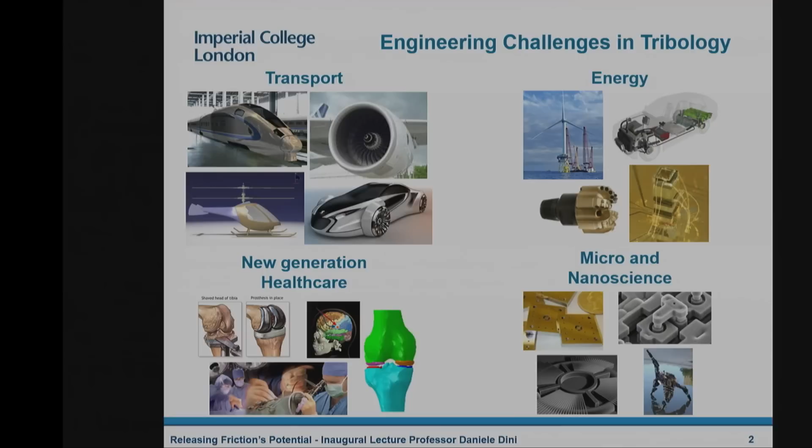Not to mention the fact that as I'm moving, I'm stretching my cartilage and moving a lot of joints in my body, and there's a lot of understanding in looking at the friction between joints that goes into healthcare, but also some more exotic applications I'll speak about. And there's quite a lot of work, especially in recent years, focusing on the importance of looking at machines getting smaller and smaller and understanding how they work, and that's where friction plays a key role.

Now, obviously, in this panorama, there are lots of challenges, and tribology is in all of these. You can almost try to look at the field of tribology in the broadest sense again, but this time looking at things that are more classical applications in tribology.

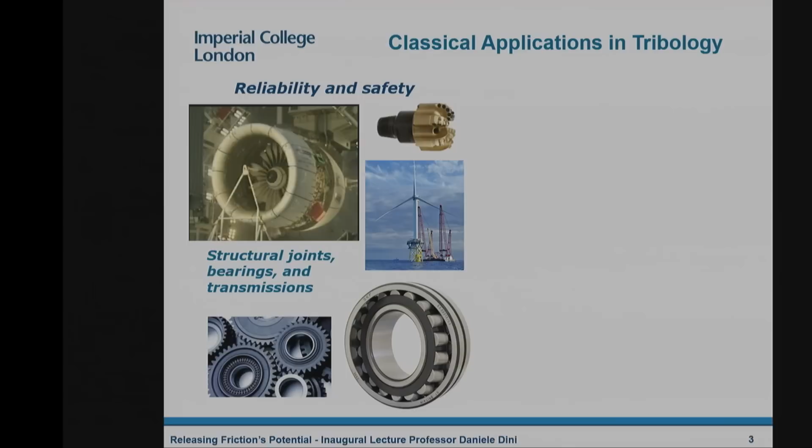And this is the application I started with my PhD when in Oxford, in collaboration with Rolls, we were trying to understand how the detachment of these blades come in these engines and trying to avoid it. And this is a typical phenomenon where you got blades that potentially run against the disk, and if you're not careful, boom.

The idea is, obviously, that's a question of reliability. You want to make sure these things are safe, and there are lots of components. There are billions of these components in everything that moves around that you want to make sure it's safe and lasts very long.

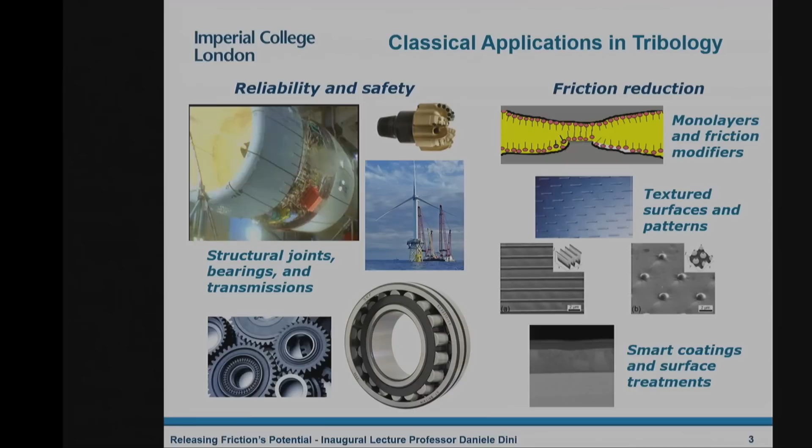Now, the other classical field of tribology is the one in which lots of people have been trying to understand how surfaces interact to lower friction. So lots of people want to save energy, we want to reduce friction, and you can do that through different things. You can actually use lubricants and improve the lubrication between surfaces, or you can change your surface itself by using coatings or texturing to modify its performances.

But obviously today, and especially looking at healthcare issues, there are many other areas in which tribology is important. So we've been looking at the way joints work, both artificial and real joints, but also you'll be surprised how important tribology is when you do neurosurgery, because you need to understand how tools, for example, interact with very soft matter.

And finally, obviously, there is, as I said, again, you go back into the fact that there's more and more applications coming from the smaller scales, and understanding how friction, the nature of friction and how it comes about with different manifestation at those scales is very, very important.

And in fact, I'll start my cruise here through the technical part of the talk, looking at various aspects of contact mechanics, but also tribology in the sense that taking any element that has got parts in motion, in this case I'm taking a bearing because there are billions of them running in any of the things that you move. If you zoom into the contact, if you zoom into the parts that actually rub between each other, you soon realize...

...that these components, A, have got rough surfaces, B, they usually have a lubricant between them, could be obviously different types of lubricants. But actually, what happens at the interface here is dominated by things that happen at very small scales. Depends on how your roughness interacts, depends on how your solid deforms, depends on how the fluid moves between the surfaces. And again, you can almost go down and down in scales to think about how atoms interact at those interfaces.

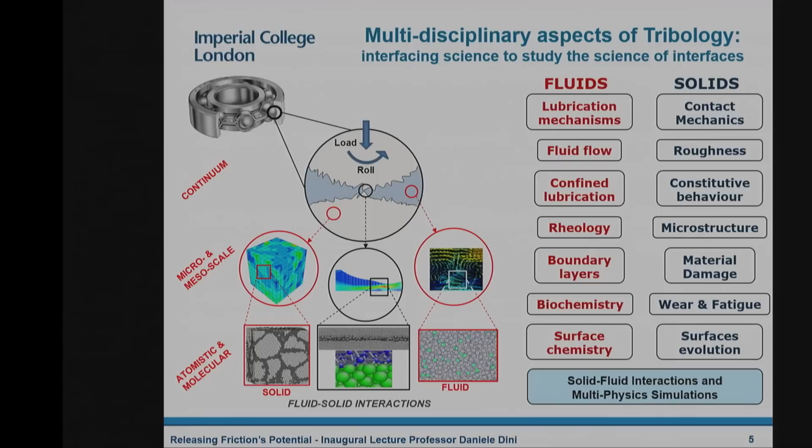And if this is the scenario, I joined the group in 2006, and I joined a group where the majority of the people in the group were experimentalists. And if you just looked around the lab, you will soon realize that people were doing experiments at all sorts of scales. So here is a map of time and length scales. And you will get people who were doing experiments on entire components. You will get people who will do experiments, laboratory experiments, looking at smaller components.

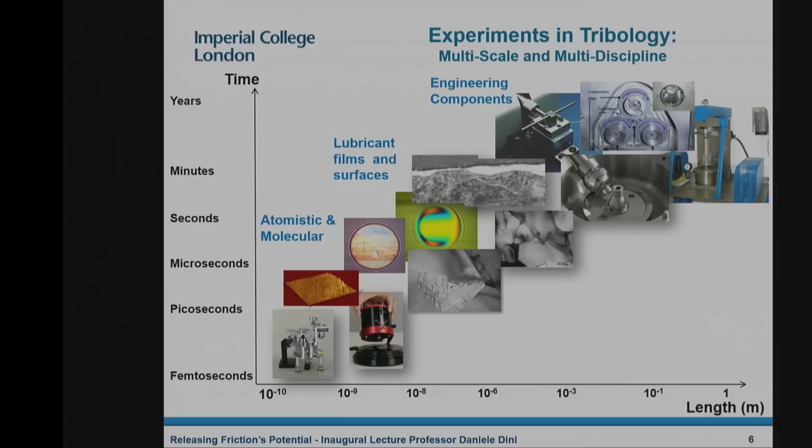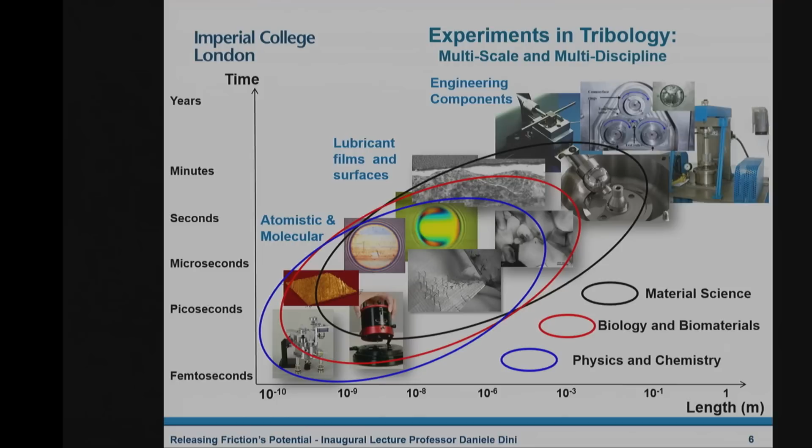And then you were getting loads and loads of experiments trying to characterize what happens at the interface in different parts. And in fact, one of the things you realize straight away is that lots of people tend to interact more when you go down in scale. In fact, you get a lot of material scientists interested in tribology when you start trying to understand how the material evolves or what happens to the fluid in contact. But also, biomaterials and biology has become more and more prominent in this area. So you get a lot of people with a biology background joining this. But finally, you also realize that the physics and the chemistry that underpins the mechanism in tribology, it's all happening at the smaller scales. And that's where most of the contributions from this area come.

The idea is that I joined this group, and all I've set out to do in my time here is to build the equivalent with models. Throughout my career, I started looking at models at different scales, and more recently at connecting models from the smaller scales to the larger scales. Here we're talking about something I'm currently doing, which is trying to bridge all these scales and combine these techniques into a unique tool that people can use in different areas.

It's been a bit boring so far, so I'm going to give you a bit of a personal trajectory. My personal trajectory went up to down. According to my mom, I started getting an interest in cars and airplanes about that age. I thought I wanted to be a basketballer, but that's a different matter. That's what she said. She's not here, so she can't testify, but I'm sure she will be hearing this soon.

Later on, I did get my interest in the larger length scales. Those of you who have never seen me around equipment or a lab will be surprised to see me doing experiments in Oxford during my PhD days. David and John definitely know I've been there. Later on, I decided that in order to go down in scales, I needed computers, big computers, and students, clever students. Both of them came very handy.

I think with maturity came the realization that models on their own are not really needed, so I jokingly put back my gown to show that experiments are also important. One of the messages I'm going to try to convey today is that there's no good model without good experiments, and I'm very lucky to be here with lots of colleagues who can support everything we do with experiments.

So let's go back to the serious stuff. One of the things I'm going to do now - and I have to apologize to those of you whose work I'm not going to be able to show - is to give pills of the research we do across different scales and how we've managed to make some breakthroughs in this area. So I'm going to start from the bottom of the scales, going all the way up.

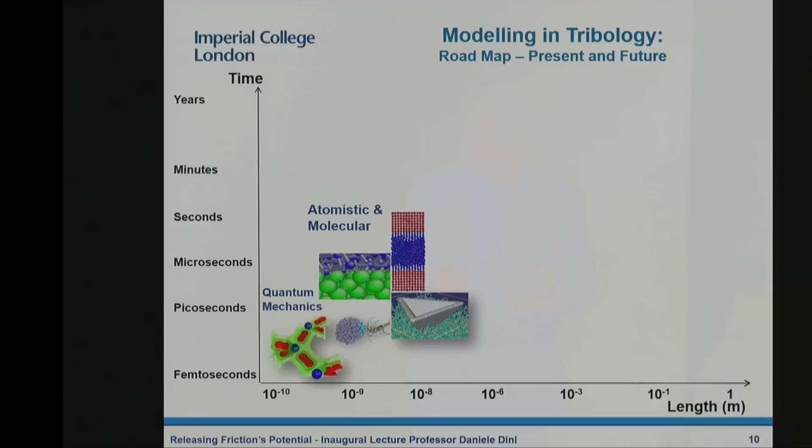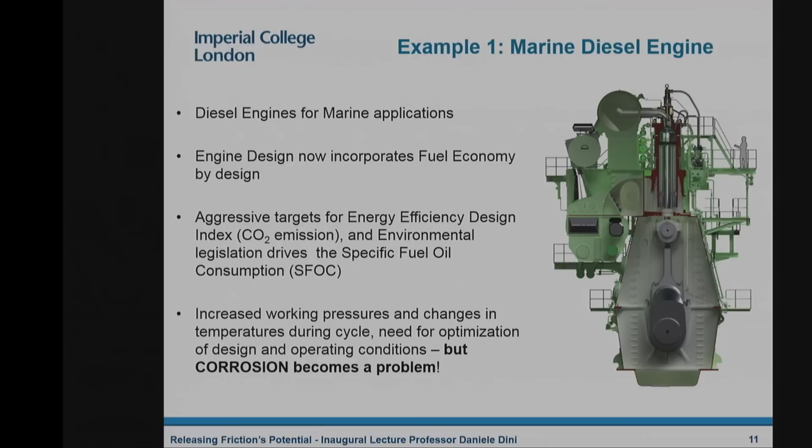Some examples of the work we've done: the first is looking at work we did on marine diesel engines, trying to understand the effect that changes in regulation have had on these systems. We really look at the system, which is very big - look, this is the size of a person - and we're trying to understand how lubrication of these systems works. One consequence of the regulation changes is that people started looking at changing their lubricants to avoid corrosion, because changes in pressure and temperature in your engine have actually caused changes in the way the system behaves.

One of the things people realized is that if you don't change your chemistry according to your operating conditions, you can get corrosion in the system. So one of the things we explored at the molecular level is the effect that changes in the molecules in your lubricant have in terms of affecting inhibition of corrosion.

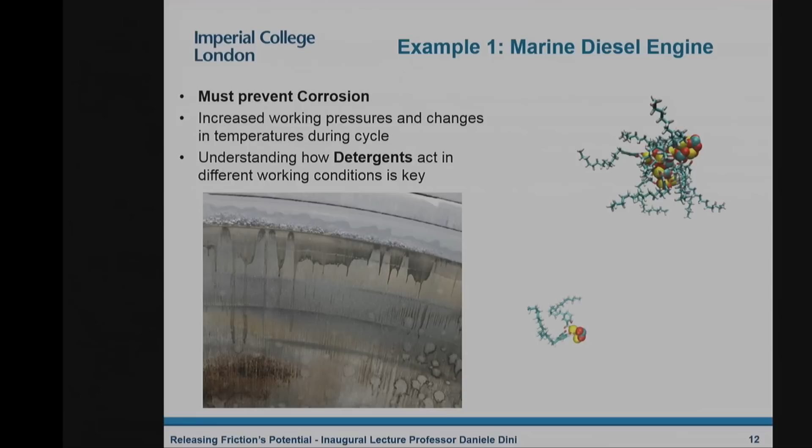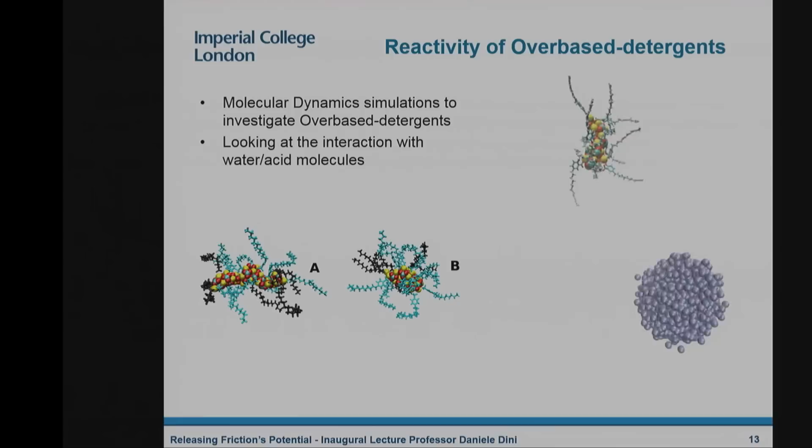Here, for example, we look at some detergent molecules and the way they develop themselves in fluids. Once they've formed what we call a micelle, we see how they interact in a bath of oil, let's say, with a molecule of water, to try to stop acid reactions in the system. With some very clever and long simulations on a computer, you can explain the mechanism by which these things behave, and start to understand how to design these molecules and how they interact with different pressures and temperatures in order to improve the performance of the system.

We're very pleased because we managed to explain for the first time how the mechanism of penetration of these molecules happens, for example, in interacting with water in solutions. And that led to my first cover.

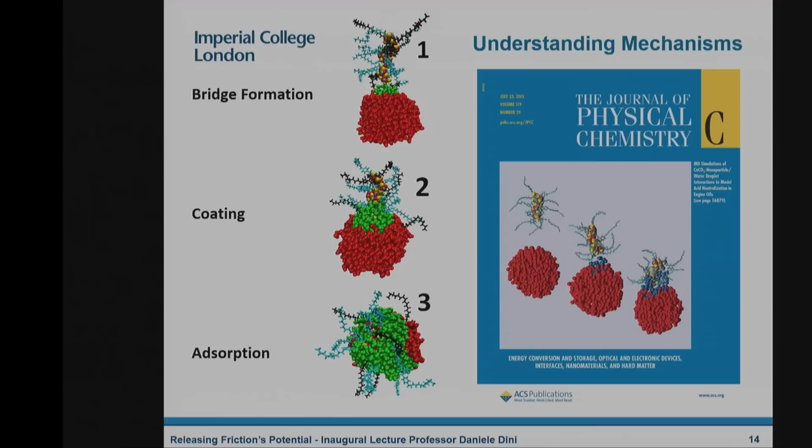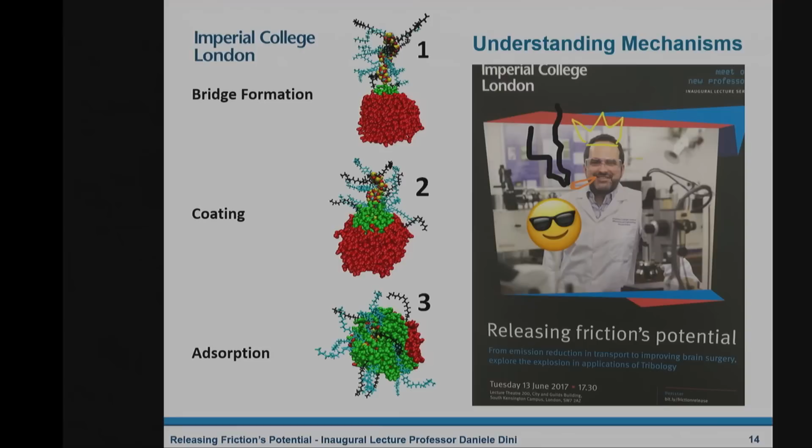Now that's the first example. I'm not going to go into the science in detail, as that would take half an hour for each topic and I have too many to cover. The second thing I want to speak about goes into understanding lubrication from the fundamentals. One of the things we set up to do with James, who's sitting over there, and others in the group, is to understand how using specific additive molecules linked to your lubricants can affect the frictional behavior of surfaces.

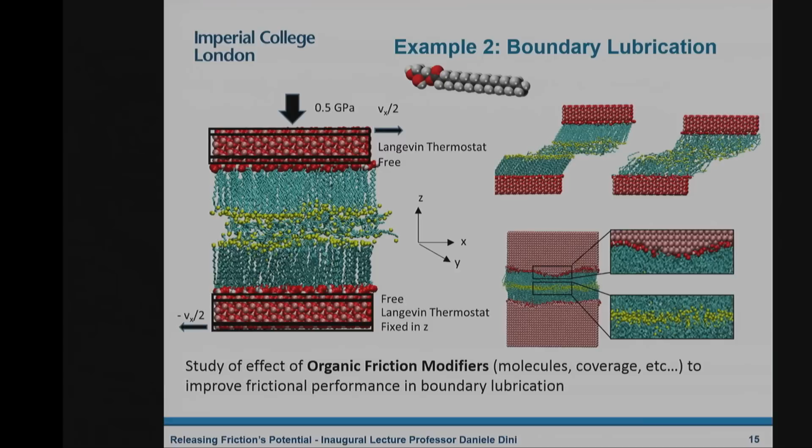Here we've explored the effect of specific additives—organic friction modifiers—when they are adsorbed on the surface. You're looking at nice iron oxide surfaces; they don't really look like that, but in a computer model they do. Here you've got adsorbed some fancy molecules put there to reduce friction. The idea of this study was to understand the mechanism by which you end up reducing this friction. To do that, we did many simulations, starting with looking at how, if you take two surfaces and squash them together—with or without roughness—and try to shear them, once you apply very large pressure, you get a certain frictional response.

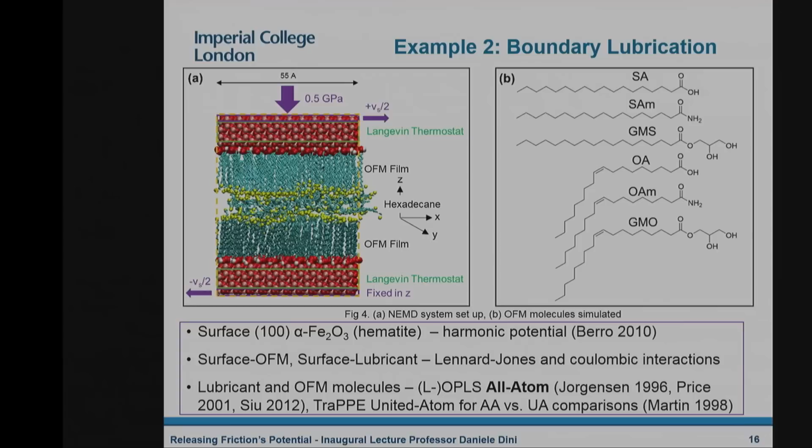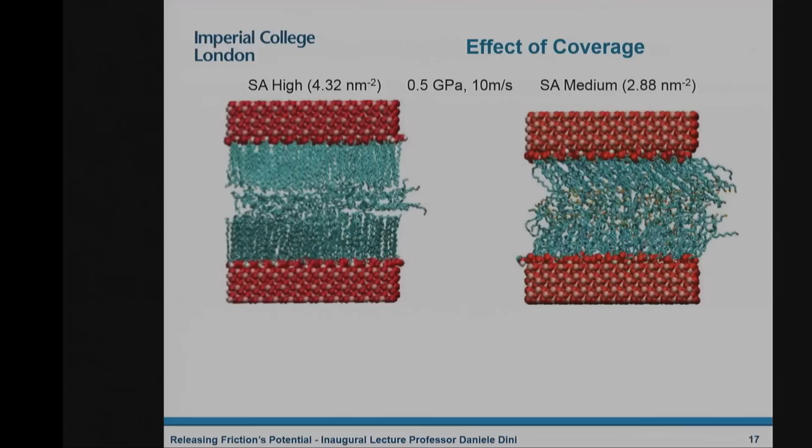We studied conventional molecules and did a lot of simulations—the best we could do with state-of-the-art molecular dynamics. We wanted to understand the effect of how many of these molecules on the surface affect the friction. If I try to squash as many as I can onto the surface, does that help? The answer comes from the simulation. If you look at this simulation moving, you're applying a load over the surface, shearing it, and looking at the friction that comes out of these systems.

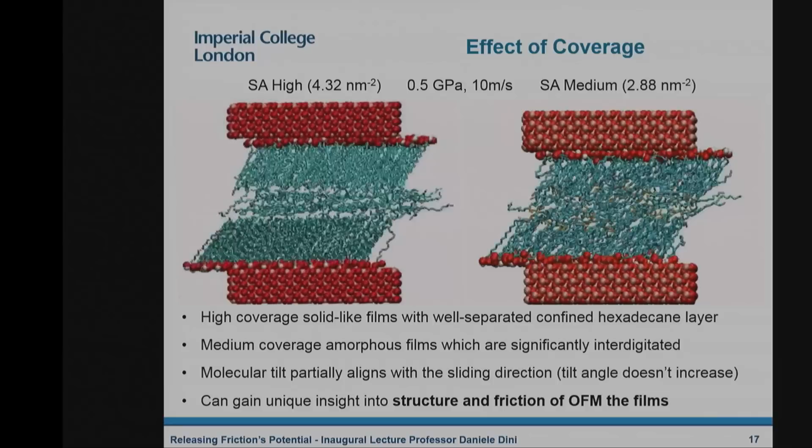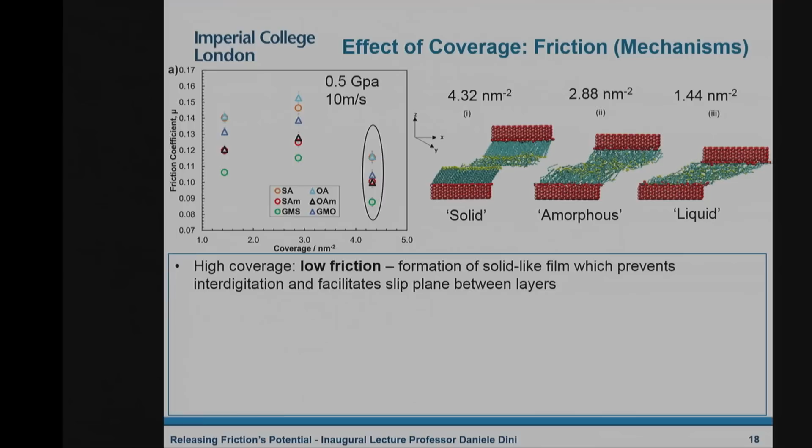It's a bit like looking at nice al dente spaghetti here versus badly cooked spaghetti over there—you'd expect the badly cooked spaghetti to be gluier and give higher friction, and that's actually exactly what happens. If you look at maximum adsorption, putting a lot of these polymers on the surface, or decreasing the quantity, you get different effects in terms of shearing of this lubricant. The lowest friction happens when you have a lot of those—you create a very structured system, and the slip is confined between the layers of these brushes. Whereas if you decrease coverage, you start getting intermingling between the molecules that stops easy movement between the surfaces.

That is also what was found in the experiments. At an intermediate level of interdigitation, with the lowest coverage, you start getting back the friction you'd get if these molecules were not present. This seems to agree not only in terms of values but also in the ordering of different molecules with the experimental results obtained by other people in the group. That again sends the message that we try to do models that explain what we see experimentally, which is one of the key themes of this.

The other thing we're doing more recently—though it's difficult to see here—is covering different structures with different molecules to see how they work. Again, the idea is to run simulations showing that different types of molecules in your system have different effects on friction.

Very recently, we looked at modeling real molecules between surfaces. This time we're not looking at very tiny gaps like before—we're looking at much larger gaps, studying the response of large quantities of fluid between the surfaces, and trying to compare our results with experiments done in the lab again.

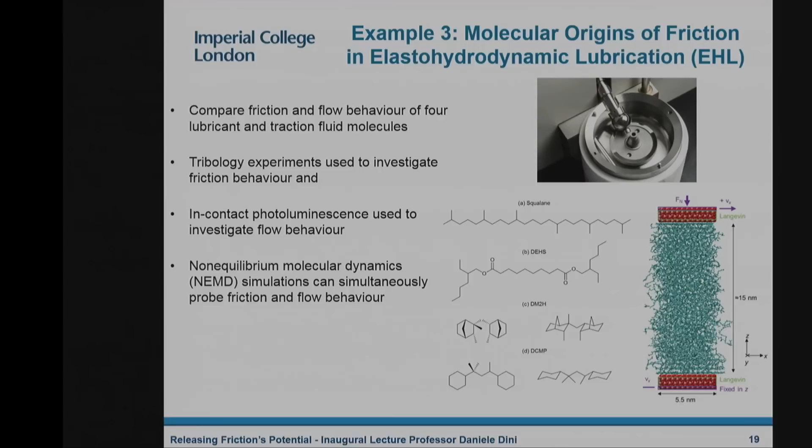One of the things we are interested in is to try and understand what is the effect of pressure and how fast you slide the surfaces together. One of the things we managed to do, which is fairly impressive in some respects, is model these things with atoms and molecules explicitly.

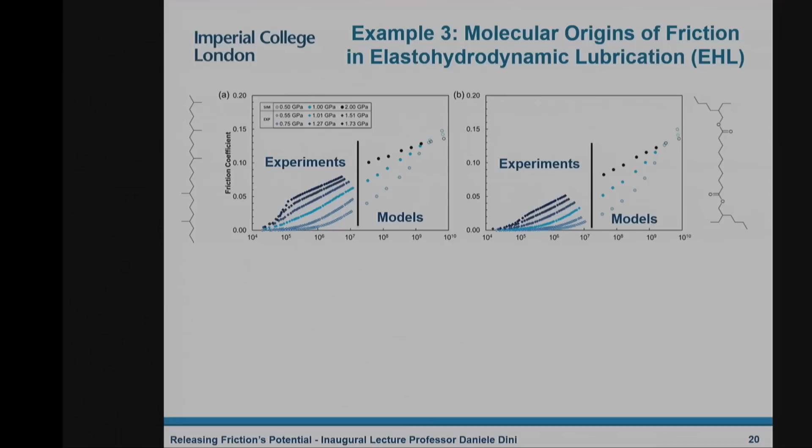We managed to push the models to scales never pushed before, and see that what we observe in experiments—for very long chain molecules, a low friction that rises with increased shear rate—can be mimicked by the models we developed. This works for all molecules, but you can also capture subtle differences between different kinds: if you have bulkier molecules instead of long chain ones, you still see a match, at least in trends, between experiments and models.

This is shown to be a function of what happens to these molecules when they are sheared. The simulations are key. If you look at the simulation, you'll find that the structure of this fluid, when confined between two walls, is responsible for the different behavior. For bulkier molecules, this is all due to shear localization, which happens much earlier than for molecules that tend to shear more easily.

This is the kind of thing we'd like to verify experimentally, and that's why we've done some experiments through Janet's group that have shown similar things on different molecules, and we're going to try to match explicitly with our models.

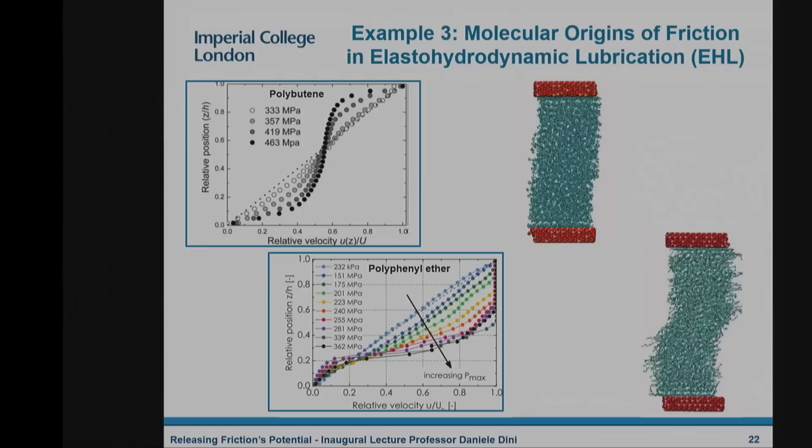That takes me to the end of that scale. Again, it shows how important looking at what happens at the atomistic level is, and it broadens the spectrum of the problem because we're going to go one scale up. I'm going to pick three simple examples to go through.

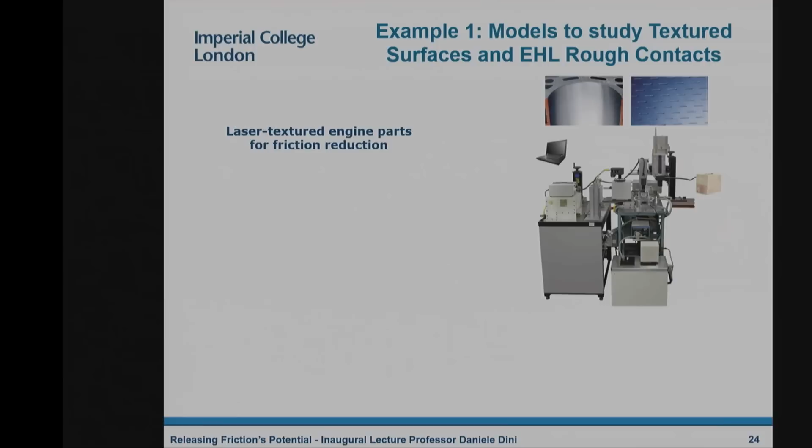The first one looks at a problem particularly relevant for automotive: why, if you texture a surface—for example in a cylinder liner in a car engine—trying to reduce friction in your cylinder, one of the most important things is to change the surface to reduce friction.

This was also prompted by a collaboration with people who could machine different types of surfaces, and the inspiration came from experiments. Here is a rig that Tom Reddyhoff developed in the lab, which tries to probe what happens at the interface between a piston and a cylinder liner.

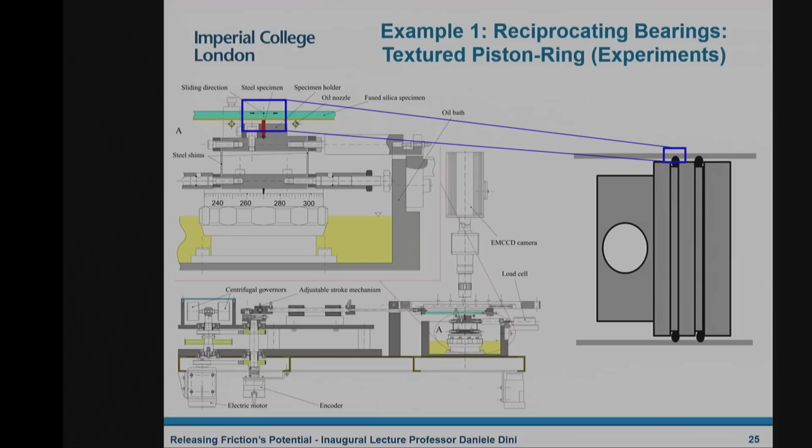Here you've got the cylinder liner replicated with a transparent surface, and a piston ring running against it. The beauty is that these surfaces, made of fused silica, are transparent, so you can look through them and texture them. The idea is that with this system you can model what happens when you slide one surface with respect to the other, and the response depends very much on what you do to these surfaces.

Here we're talking about looking at the microstructure of these systems, with pockets on the order of micrometers in size. So we're really talking about how a micrometer-sized pocket can change the behavior of this system.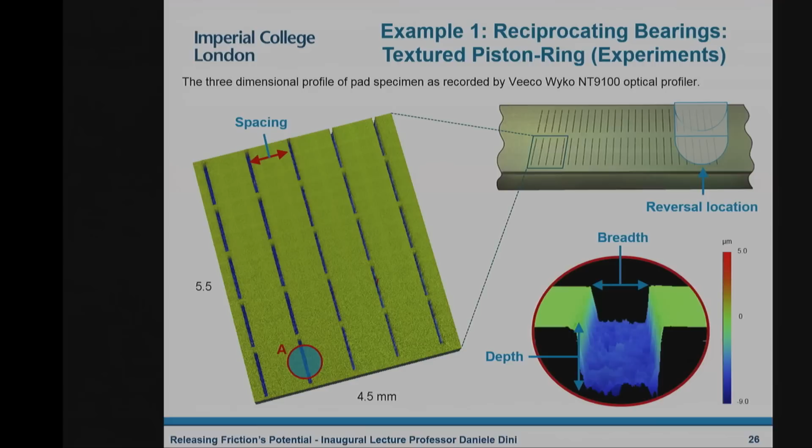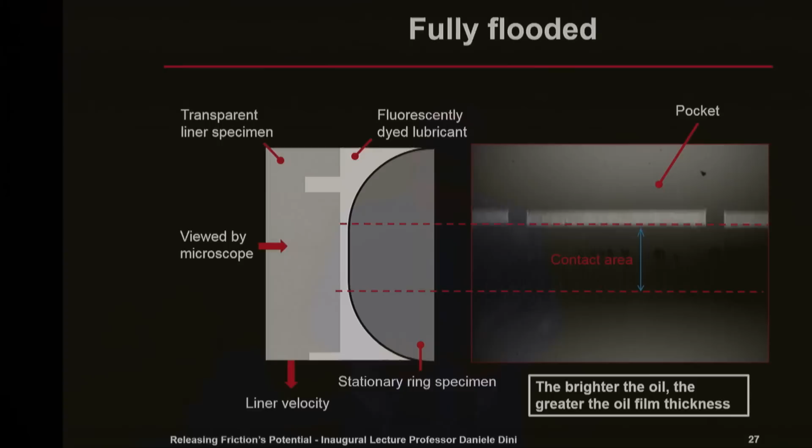I set out to explain this by first looking experimentally at what you see. If you look through these surfaces—say your sapphire window is here—you look through while the surfaces move with respect to each other, and if you monitor this, you see there is interaction between the pockets and the fluid.

You can see pockets of bubbles forming at the inlet and outlet of this system, and these obviously change as the velocity changes.

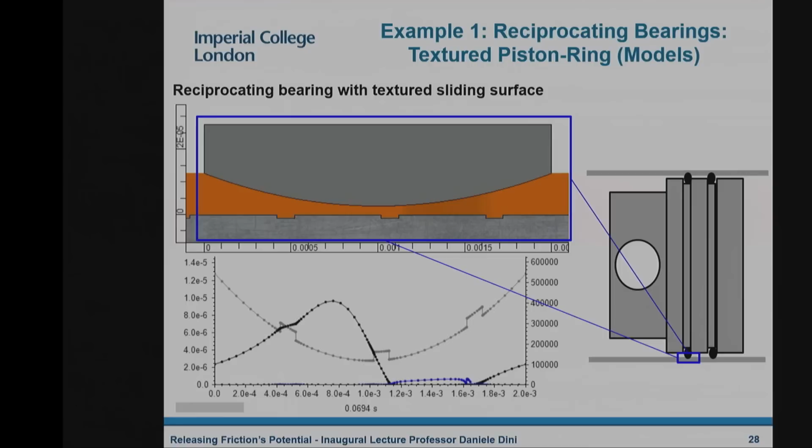We have since managed to explain this by looking at models that explain exactly what happens when a pocket traverses a contact, where you see a change in the fluid—cavitation happening, the fluid changing phase. As a result of this phase change, there's a change in the way the system takes on pressure from the lubricant, which is very important because it explains what happens through these pockets, and this can be explained with models.

I'm not going to go into the details, but it's the interaction between this pocket and the fluid that is responsible for the reduction of friction.

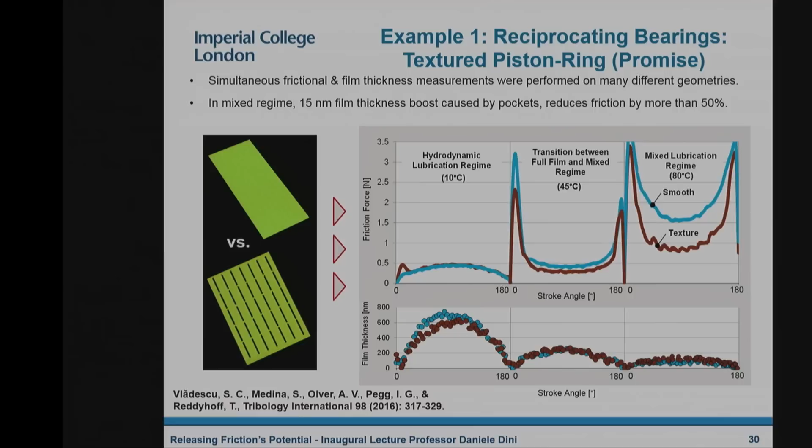This has been demonstrated in different kinds of problems, and there are different effects happening at different speeds. Imagine going with your piston at different speeds - at different speeds you get different buildup of fluid between your surfaces. Our model also allowed us to explain why at different speeds you get different effects.

In fact, the presence of this texture can reduce friction quite dramatically. These are the experimental values from Tom, and we get models that explain exactly the same trend. So that's, again, a bit more classical.

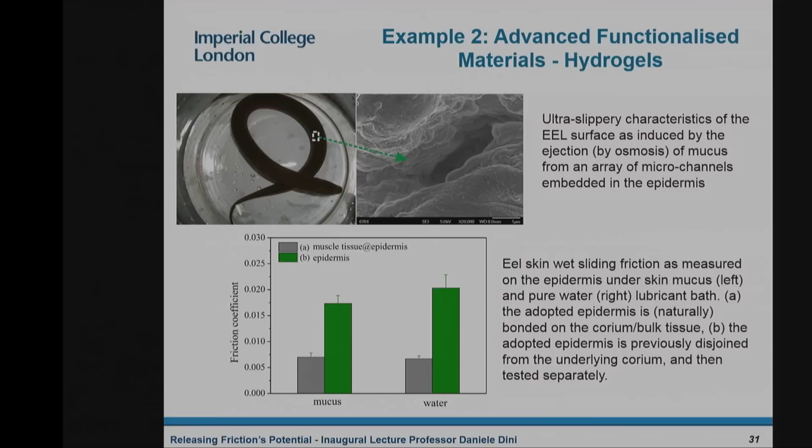Let's look at something more funky. The funkier application comes from my colleagues in China who wanted to do something biomimetic and decided to look at eels. From experimental evidence - squashing the eel and doing something to it - they worked out that the very slippery surface on the eels is due to the presence of mucus, which comes out by osmosis from pores.

Inspired by that, they developed something similar. They took a system with pores and infiltrated it with polymers, then cross-linked these polymers to form a hydrogel. When they cross-link this polymer to form a hydrogel and peel off the excess hydrogel, they end up with a series of polymer hydrogel heads sticking out of the surface.

It turns out that if you put this material in contact and try to slide something over it, if the liquid between these two surfaces has a certain pH, you can get very low friction. You basically don't need any force to make this thing slide.

Not only that, it looks like if you change the pH of the solution from very acidic, low values, to very basic, high values, because these hydrogels swell and deswell, there's a chemomechanical action in these hydrogels - you can change your friction coefficient almost instantaneously, going from very low to very high. So you've got a way to switch friction in the contact between these systems.

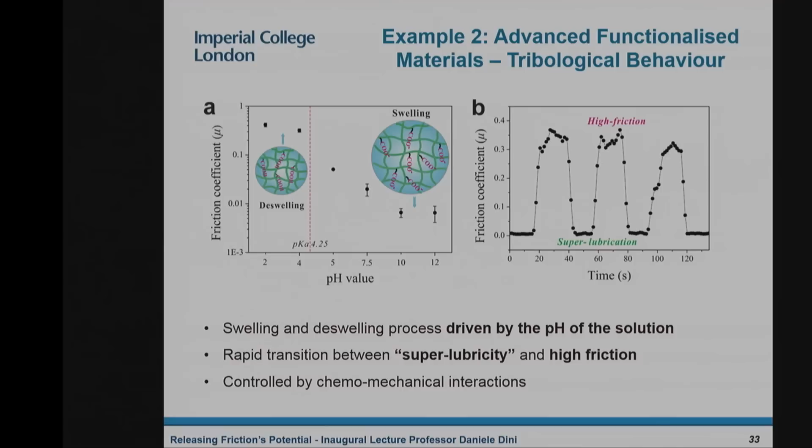If you go very high in pH, you start swelling your hydrogel. Swelling hydrogel means you've got more lubricant available to replenish the surfaces, so friction goes down - and in fact it can go down dramatically. You can talk about friction changes of 2 orders of magnitude just by changing the pH of your solution for these systems.

The good development from this comes from the fact that once you know you can tune and switch your friction between surfaces, you can think of tons of things you can do with this.

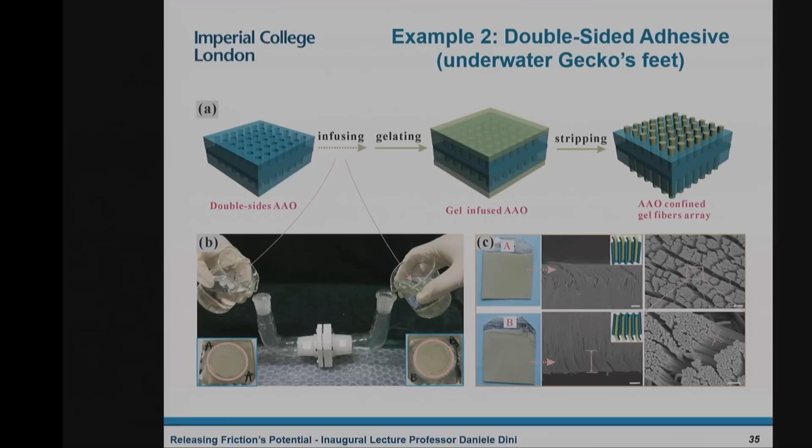One of the things they did, and we did the theoretical explanation for, was to create a system with 2 of these surfaces on each side. The idea was that thanks to these hydrogels, which are actually very fibrous, having them on both sides you can generate a structure like this, and you can think of putting it between 2 surfaces.

Imagine placing this system between 2 surfaces and squashing them with a certain load. Simply by changing the pH on one side of the membrane or the other, you can lower the friction. So if you're in a situation with low pH on both sides, you can hang any weight you want on this system when it's squashed between, and hold quite a lot of load.

But then if you actually go and increase the pH dramatically, you get a very slippery system. So your adhesion forces, your weight carrying capacity, goes down drastically.

There's an experiment showing here that with the same kind of tweezers, if you put the same type of apparatus and change the pH of the solution with which you wet the system, you get completely different holding capacity in the system. And that, I think, is a nice way to show nice engineering through friction.

Now, the other things we do, and again it gets a bit fancier in terms of videos and things, is another example - this is Lee's work in collaboration with Berend and Fabian, looking at bubbles.

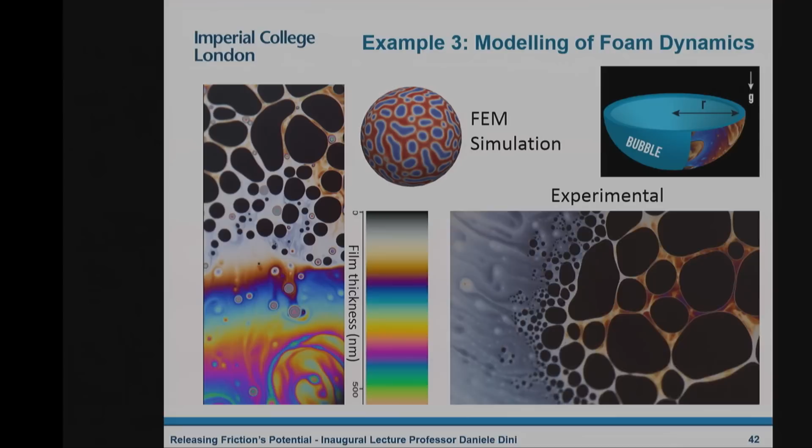So that's a video that won a prize, showing the mechanism by which foams evolve. Here you're looking at a bubble from the side, looking at the patterning evolution of these bubbles, and trying to explain the coarsening behavior due to the chemicals of the surfactants in these fluids. This is just a soap bubble that you can get in your system.

In reality, some of these coarsening effects can be explained through models. If you look at another bubble, this time in front of you, very large, and look at the way it evolves, some of these patterns again can be explained mathematically - that's where the theory comes in, because they depend very much on how many of these surfactants, how many of these molecules you have while you form the thin layer for the bubble.

The mathematical theory that we've developed tries to explain why you start seeing these patterns forming in the area where the bubble is going to break. This is one of the achievements that actually explains why in different regions, when you have a bubble, you have different patterns that evolve in time.

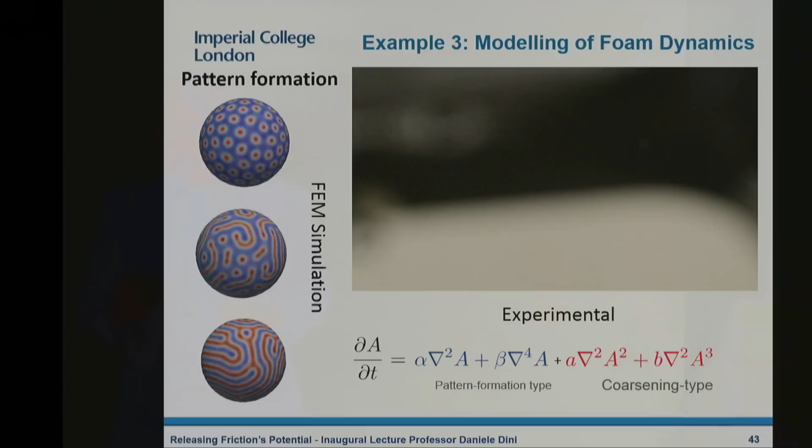This is very interesting because it tells you the dynamics of the flow and how important it is in understanding the breaking. Now, finally, if I move on to larger scales, there are a couple of things I wanted to take you through. One of them is going into a classical application of tribology, specifically looking at high-performing engines.

So the first thing I've shown you so far is we've taken you from the smallest of scales all the way up to larger scales. So obviously, as an engineer, you're interested in understanding how components work. One of the things we do is try to predict the behavior of full component systems.

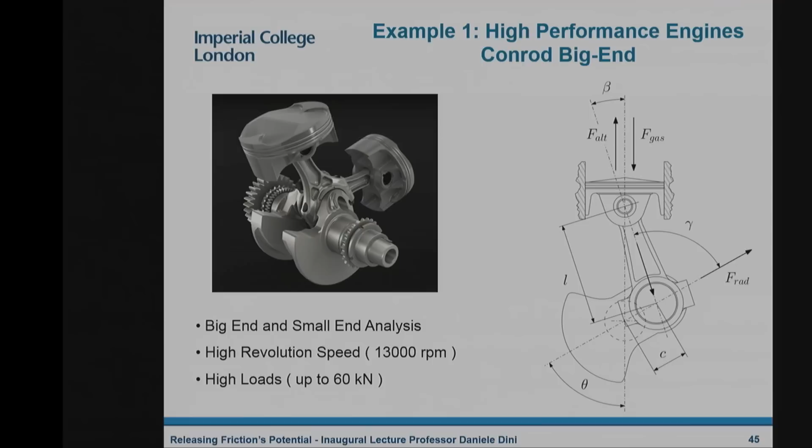I'm taking a high-performing engine from Ducati and trying to understand what happens in the bearings of these systems. You need to understand that when this motorbike cycles - if you've ever been on a motorbike and listened to the engine - there's a lot of dynamics going on, and the load transmitted through this component is very high. So the secret is to understand what happens in this bearing, so I'm only interested in part of this engine - what happens at the interface between different components.

The way to do this is to understand what happens at each individual component by looking at the tribology of it. In order to do this, you cannot just study the entire system - it's too difficult. You need to find a system to take, say, a full component and look at the regions of interest. Here, the region of interest is the contact between this element and the pin that goes through it, because that's where the rotation happens.

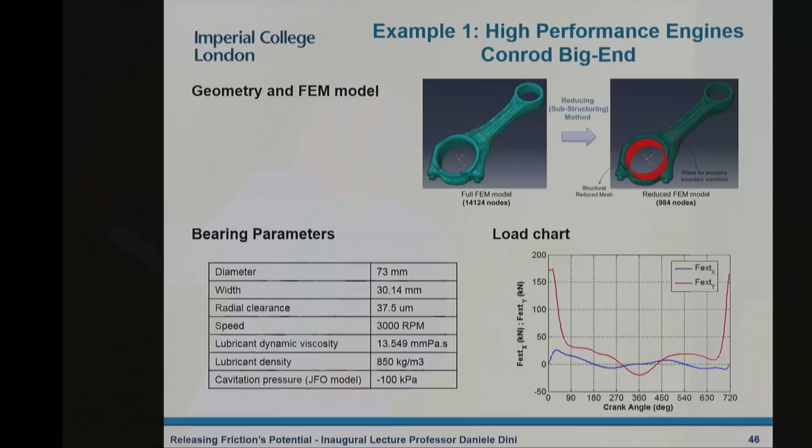Obviously, this is affected by very large loads, and these loads are varying in time because your engine has got quite a lot of varying loading scenarios. So the model that we use takes information from the full-scale system, the loading for the full-scale system, and then looks at the details of what happens in this bearing.

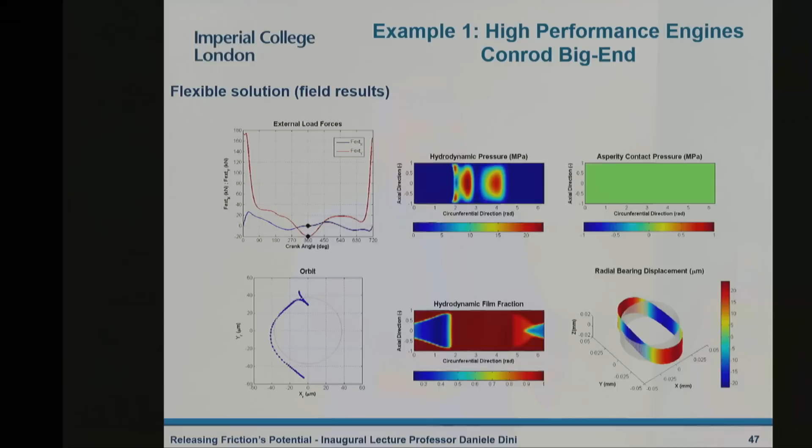So this bearing is deforming in time. This bearing has got some pressure building up as you load it with the lubricant between them, and also has some cavitation forming - so there are some bubbles forming as you go around the system. Now, the combination of all these things is what governs the performance of the system in terms of friction, but also in terms of the way this system fails.

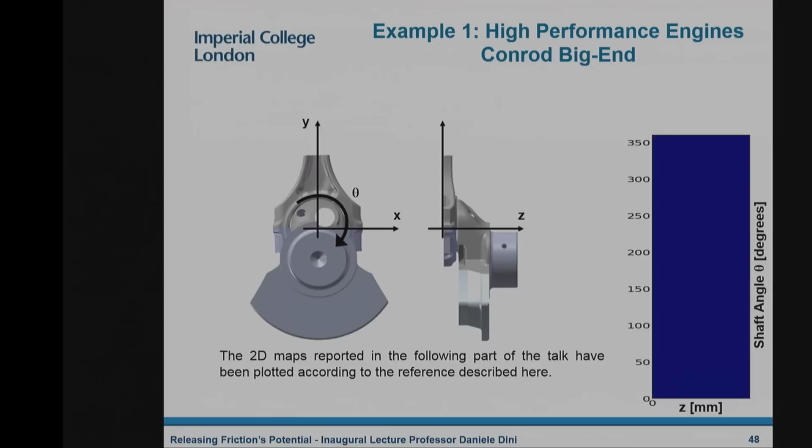If you look at this component a bit more in detail, and especially if you look, for example, at a cut through this system - I'm only looking at, if this is the bearing, I'm now slicing it through and putting it on a plane. If I slice it through and look at what happens in this plane, I can look at the time-averaged information of these systems and start, for example, plotting areas where the pressure is the largest - that's where you expect the larger loads and stresses to be.

Then I can look at places where I might get direct contact between the components, which are also of interest. But most of the time, the thing which is most important to understand is damage induced by cavitation - bubbles forming in the fluids and then imploding back onto the surface and causing damage. It's trying to understand in time what are the regions of your bearing where this formation and collapse of bubbles happens most often.

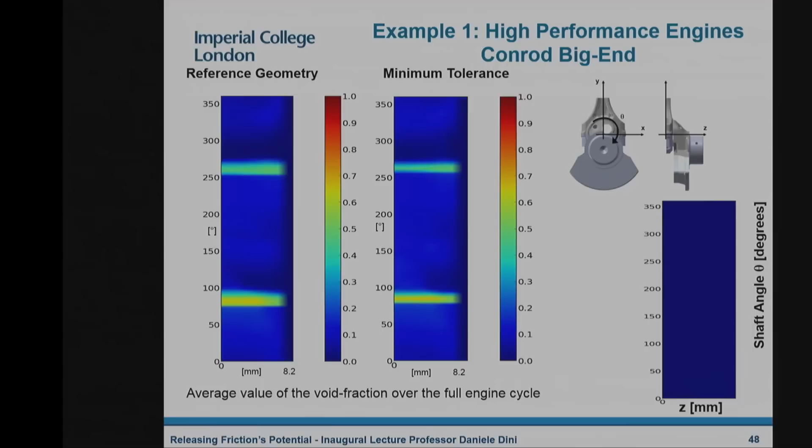Through a lot of this simulation, one of the things we came up with is what we call the cavitation damage index, which tells you exactly how quickly and how fast these bubbles form on the surface. These seem to correlate very well with the regions where these bearings see damage, and therefore enabled us to

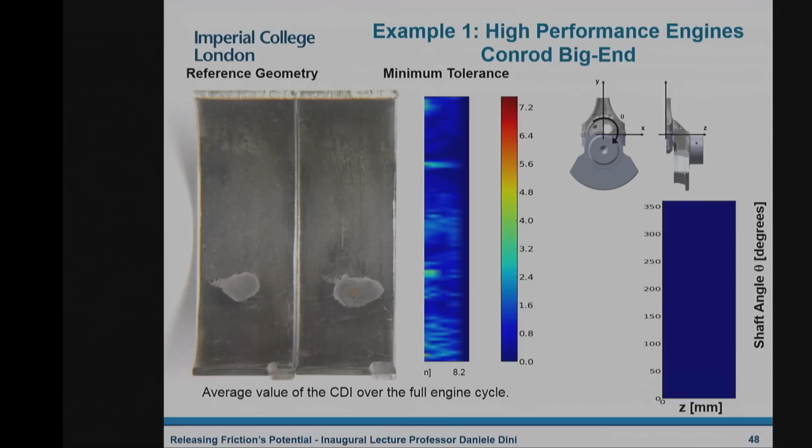solve a very important technical problem on a full component scale for these systems. And again, this is on a very traditional type of application. So let's look at something a bit different.

Lots of the things that we've done in different applications touch on different fields. One of the things that I've been getting more and more passionate about is looking at biological applications. One thing that's been of interest and very important in the last years, in the past decade, has been trying to understand how friction develops between joints, in its cartilage and cartilaginous tissue between joints. This can only be understood if you understand what happens to the cartilage while you're rubbing it.

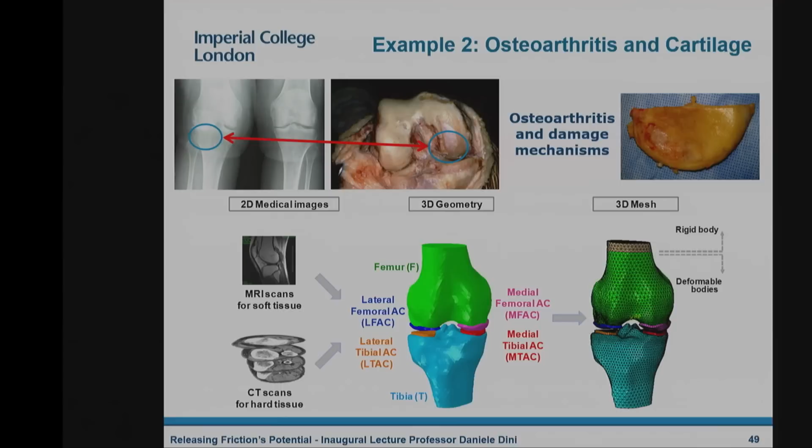So one of the things we set up to do a few years back is to try and get a better understanding of the working of cartilaginous tissue. This has been done through models, trying to understand the fact that this tissue is composed mainly of water, and cannot operate if you assume that it is actually solid.

The way this tissue operates comes from the fact that imagine you have a cartilage tissue here, you've got a bone here, and you're trying to slide something over them. If you slide something over a material which is porous, has got fluid in it, and you're trying to actually squeeze this fluid out, the dynamic of the fluid going in and out of this tissue is what governs the way the tissue deforms.

That can explain why you can get very, very low friction in cartilage. We're talking about almost zero friction in cartilage when you walk, and that's the reason why most of us don't develop osteoarthritis in the early stages. It's because of the fluid flowing through this porous structure that maintains the load.

And what that led to is the development, or helping the development, of synthetic tissue that could potentially replace our cartilage when it gets damaged due to a sport injury or other potential issues.

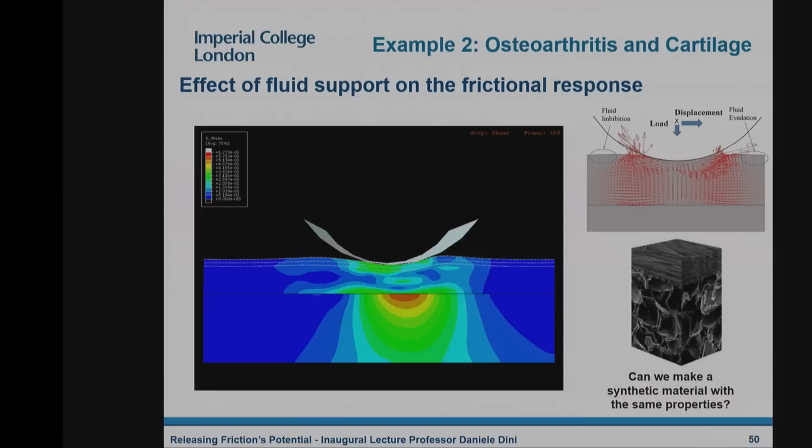The other thing we did, once we understood the concept and working of these systems at the smaller scale, we ended up doing full joint models, where these full joint models account for the real working of the cartilage and look at the dynamics of the joint.

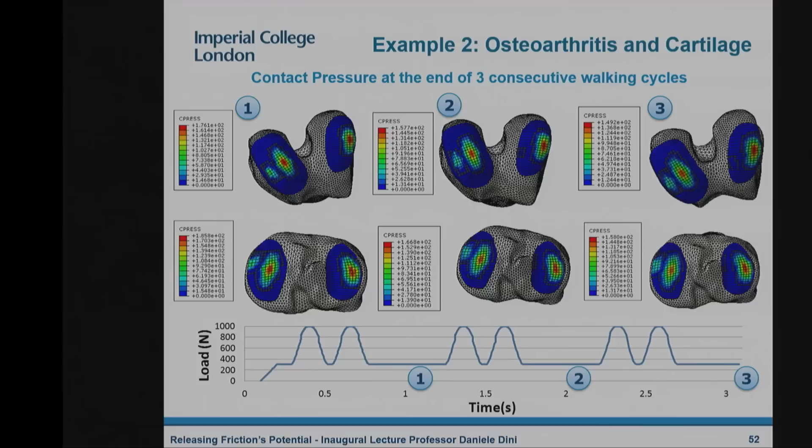One of the things we managed to work out the first time was that if you subject this joint to a loading cycle, this is a typical loading cycle, one cycle as I'm walking, I've done probably hundreds of them by now. You see there is a change in the way the pressure in your system develops, and this pressure tends to diminish because the system tends to relax as you walk. In fact, sometimes walking is one of the best cures to avoid arthritis in some respects.

The last example I'm going to show you at this scale again goes back to biology, and to trying to solve an even harder problem. This time, inspiration came from Ferdi and his group. Ferdi has set up to try and contribute to solving a problem in neurosurgery, which is trying to operate on glioblastomas, which are actually tumors in the brain.

The key innovation of the idea is that in order for you to be able to access areas in the brain and be able to operate on or reduce the tumor, you need to be able to access areas that you can't really access in a straight trajectory, but you would ideally like to go around to avoid critical areas of the brain while you do that.

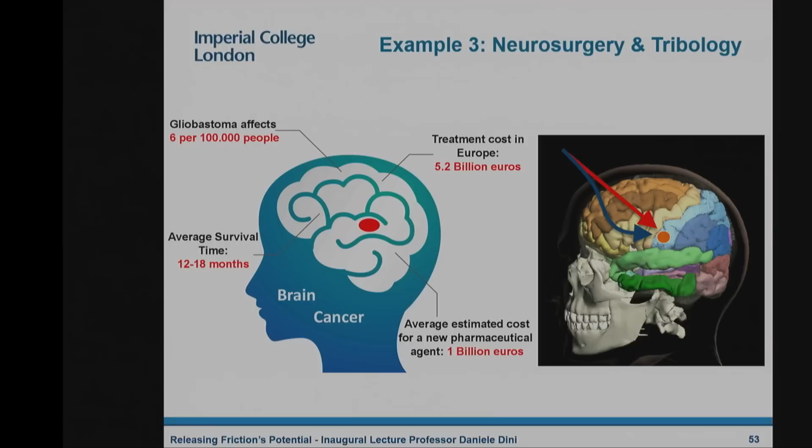To do so, Ferdi's group have developed some very clever techniques looking at wasps and the way wasps inject their eggs into wood. They have developed something very interesting that allows you to navigate one of these catheters into materials and avoid obstacles in it.

And that's where our collaboration started, when Ferdi realized that some of the modeling, the understanding of how this goes through the material, and some improvements to the understanding of the materials itself, being brain tissue, a very difficult material, could have helped. And that's where I come in.

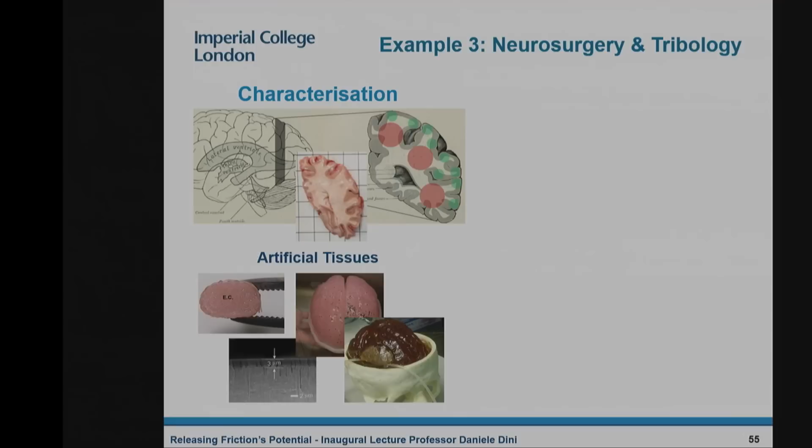We try to do quite a lot of work to characterize brain tissue, understand if once we know brain tissue, special phantoms can be made so that we can mimic the real behavior of brain, and also understand with models how you can predict the behavior of this system, which is phenomenally complicated.

We started by doing some very nice work on real brain. This is a human brain, and the only way to characterize a human brain is to be lucky enough to have samples to analyze. From there, you come up with a description of the way they behave mechanically.

So if you squash them, if you shear them, what is the behavior of this material? That led to discoveries, thanks to the work of Francesco, Antonio, and other people in this room, of a material that potentially could mimic the mechanics of brain. It came from almost the same route as the material I've shown you before for the heels. It's a hydrogel—you get polymers in certain quantities and combine them to create a material with a certain microstructure.

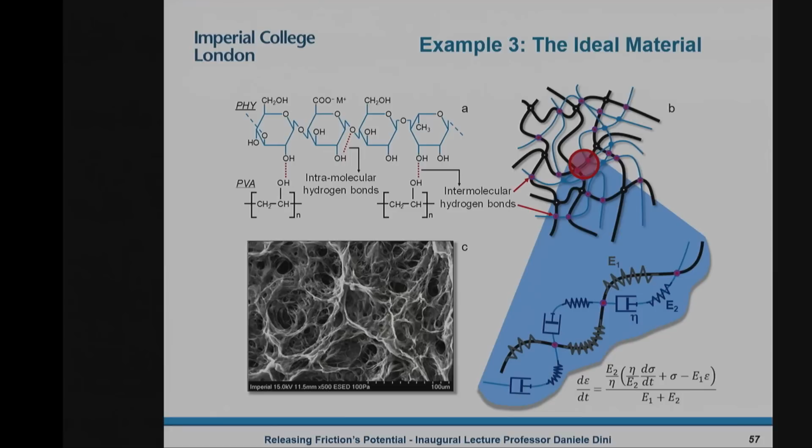Brain is composed mainly of water, and the way it deforms depends very much on how water is dispersed into this material. So the material we developed creates a network through which water, or spinal fluid, can pass through, linking different molecules. But the idea is that once you've made this material, the real breakthrough was: can we make this material available to people?

So that you can create phantoms from real patients' MRI. You take an MRI of your patient, do a specific procedure with 3D printing to create a negative of the brain, then you actually cast or print the brain to create a real structure that resembles it.

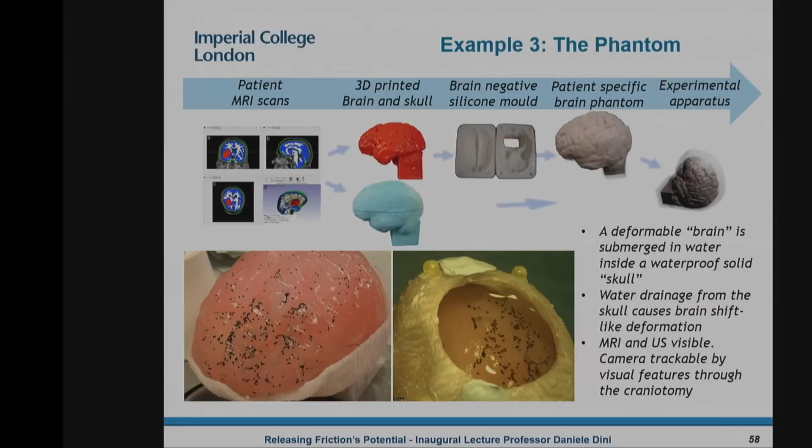So you can think of this as a potential application not only in understanding how the brain works mechanically, but also in training people. If you get someone to train on a material which looks and feels much more like brain, you avoid quite a lot of ethical and non-ethical issues in the training aspects.

But the ultimate aim here is to see if this material actually behaves like brain. So we took that into an MRI scan and scanned it. One of the things we were interested in is whether, as you see in patients when you turn them and do a craniotomy and wait for the tissue to move and relax, we get the exact same deformation as we see in patients.

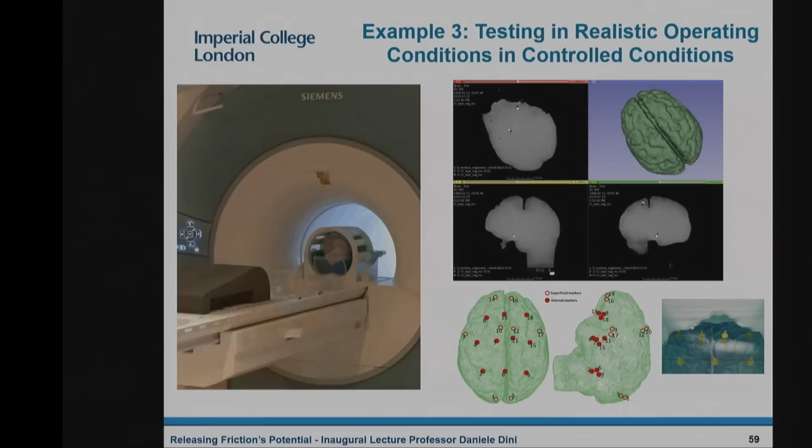So do we see our material deflating, shifting, as real brain does? The answer is yes—we could track through some probes the deformation of this material. One of the most intriguing things we could do was reproduce through models the shift of our material in the skull, giving a two-way comparison with our model, showing that our representation of brain, or at least the material we think reproduces brain best, is an accurate reproduction of reality.

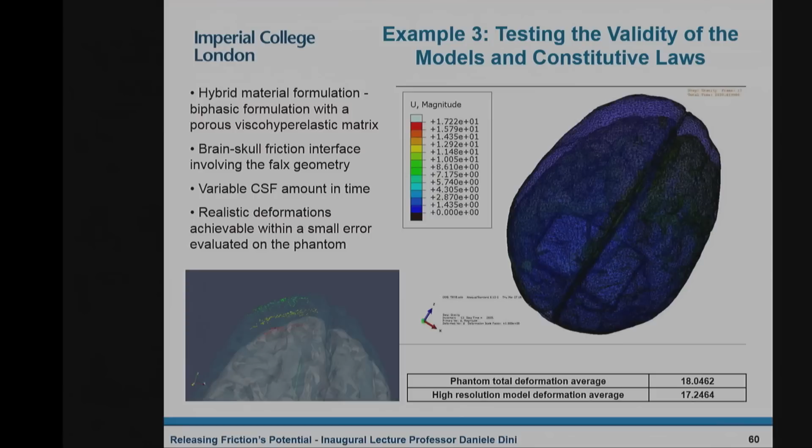And obviously, the other step I haven't shown you is that we've done quite a lot of work to try and understand how things go through this material, which is far more complex.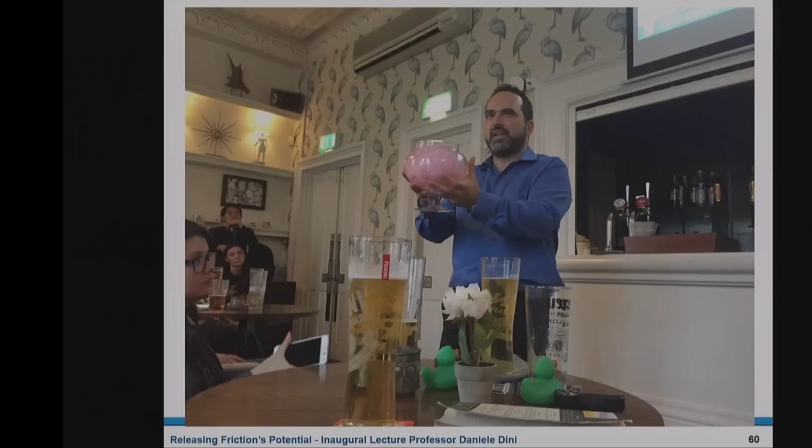Certainly, one of the accolades I got from this is that I managed to get one of the best prizes for an academic: to give a talk in a pub. There were times giving a talk where I wasn't very sure what was the beer and what was the brain, so I got very confused at some point. But I guess I've shown the relevance of the work to different people.

Going back to this brain issue, what I've shown you is not the end of it. In fact, it's much more complex than I made it seem. At the moment, we know that taking a brain, we can look at its deformation. But as I said at the beginning, our idea is to move a catheter through the brain and deliver a drug at some point in a way that maximizes its effect on the tumor.

To do that, it's not enough to know how the brain deforms macroscopically. What we're now set to do with Andrea Zench and other people in this room is to understand how the microstructure of the brain affects fluid flow when you inject something into it. This takes us into looking at the microstructure of these systems and how it affects performance—that's the idea.

If you get a scanning of the microstructure, you can understand better how this drug gets delivered to different parts of the brain. Now, having taken you through this whole journey, one thing I want to mention, to end the technical part, is very simple: we've done all of this.

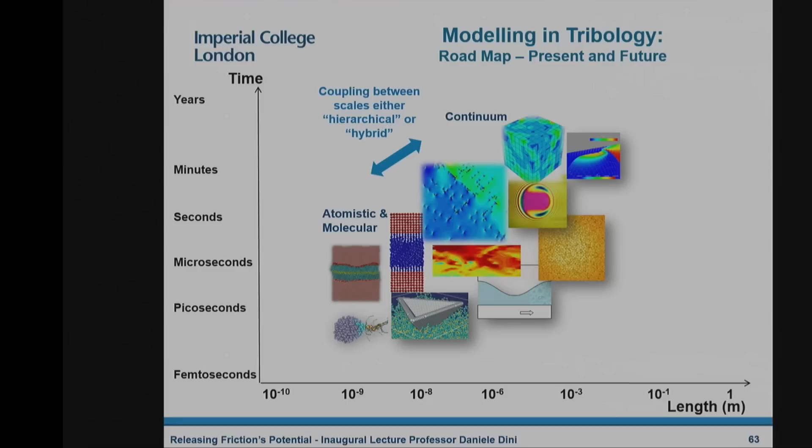We know things at small scales, intermediate scales, and large scales. One of the key things to do in our area is to try and link up these things at different scales, and there are different ways of doing it. But one of the things I'm going to show you that we have recently developed, and it's a very interesting way to do things, is the following.

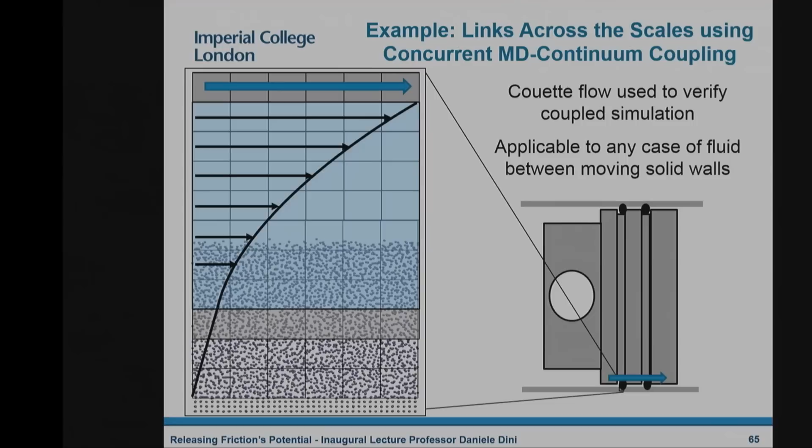I've shown you that I can model with atoms and molecules what happens near the walls, and that we can model fluid flow in a continuum way. Why can we not try to link these two types of modeling into one combined model? So one of the things we've been working on, with Dave, Ed, and Edu, is to develop a technique that allows us to model atoms and molecules where we need them, together with a continuum description which is much less expensive computationally, and can be used to explain what happens between surfaces when you slide them. That has led to techniques that can study very large systems with very small computational resources, because the computational resources are only used to explain what happens here.

Now, one of the movies I'm showing you here gives you two surfaces, with the top wall moving. If you know the fundamentals of fluid mechanics, you know that if this is a Newtonian fluid, or a very simple fluid, you would expect that as you move one wall, in a steady state, the velocity profile would be a straight line. That is if you have a fluid which doesn't have any structure or particular properties.

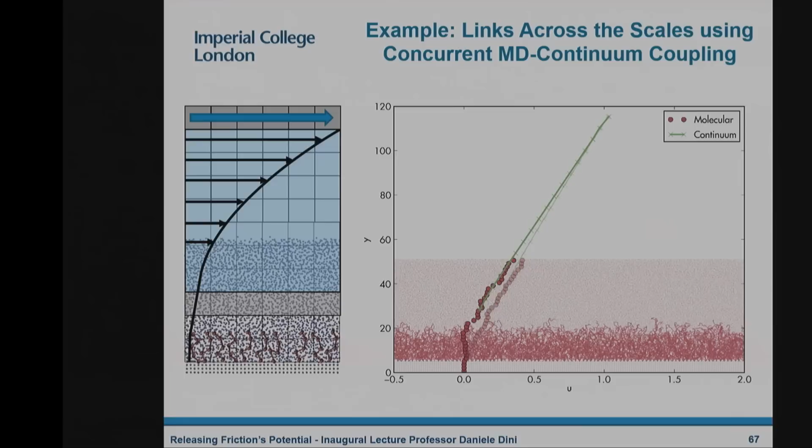But here, for example, what we did was put some polymer brushes on the surface. You can see that the effect of the polymer brushes is to change the fluid dynamics of the system by switching the point where the velocity profile goes to zero. This has a profound effect on the flow above. Obviously, we're trying to understand how this can be used for much larger systems than just a simple system with molecules.

Now, I hope I've conveyed my pleasure in working in this area. One of the things I hope you've gathered is that to study this phenomena, you need to know quite a lot about different areas. You need to know how fluids move and be able to explain their interactions. You need to know how things behave near the walls. And there is a plethora of things that are still to be explored. This makes this area a fantastic area to work in.

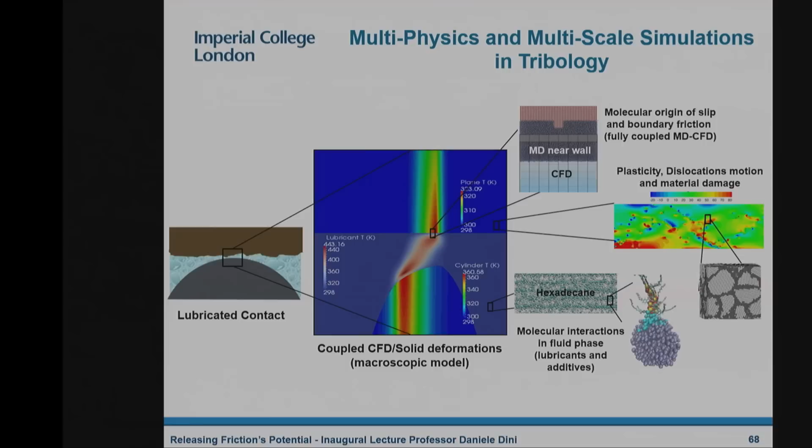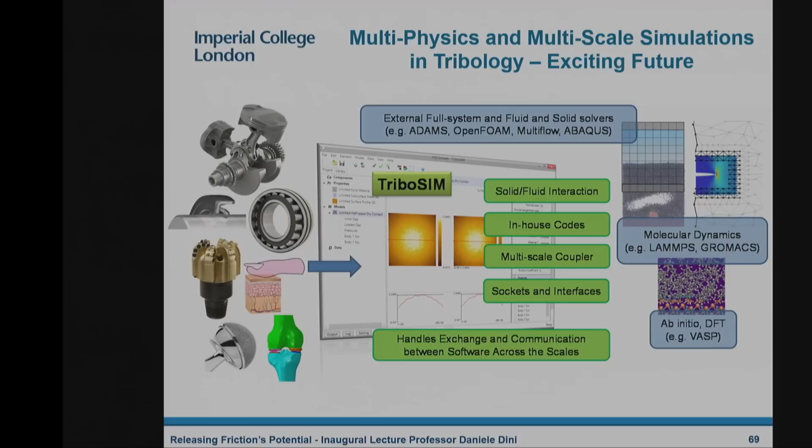The final development we're trying to do is to combine all of this into a software tool that people can use. We have tons of these models developed in different areas, different scales. One of my targets for the next 5 years to come, at least, if not 10 or 20, is to combine them into a unique tool that people can take and use, whether academics or people in industry, something that combines all these things into a package that you can operate without actually knowing all the machinery that is behind it.